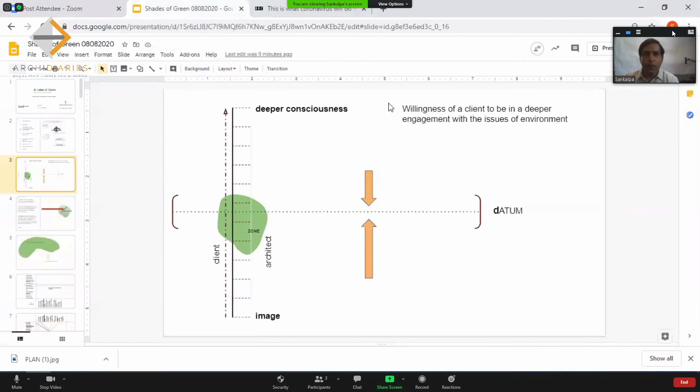Thank you for inviting, and good morning everyone. Today's format, which is a mix of presentation and interview, is quite interesting. What we have done is made a small presentation, which will be followed by a dialogue between both of us.

Today I represent Thumb Impressions, and I'm showing a lot of work related to practice. Thumb Impressions is basically a team of 4 members right now, and their key interest is largely in construction to begin with, and obviously then it touches various other aspects of architecture.

We thought that today's presentation should be titled Process, Contradiction, Challenges. I have put 'hope' in separately, because we hope that in the process of discussing process, contradiction, and challenges, one would be able to see different facets of hope. We don't want to directly touch upon the word hope, but it was important to include.

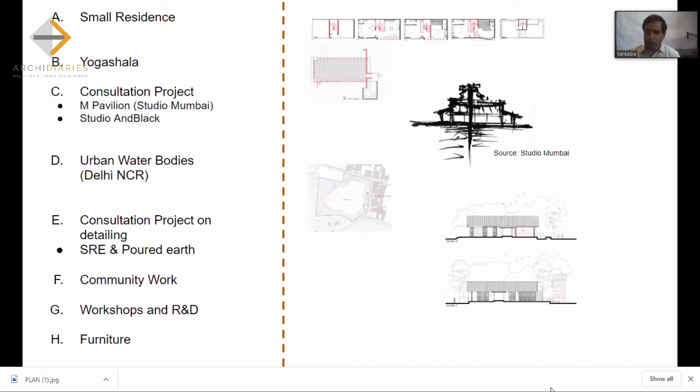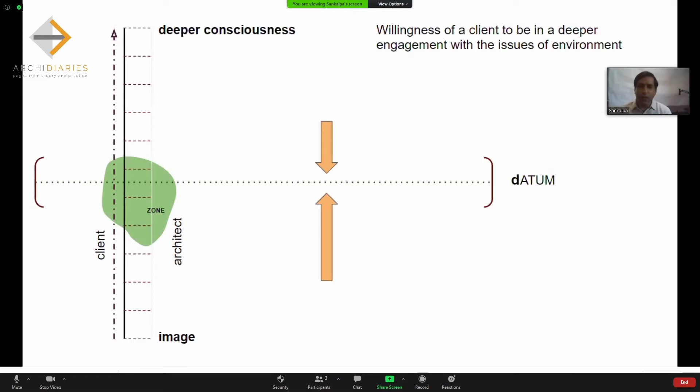Now, what is important for us to at least inquire about, based on our experiences, is a diagram which says that on the lower portion is an image, and on the upper portion is deeper consciousness. These are two different extreme ends of issues of environment.

Based on practice, what we are slowly realizing is that at an extreme, people are selling sometimes luxury in terms of green, which are merely consumption, and at another facet of it is a deeper awareness about the environment. Somewhere in between is this journey which all of us are having.

So on the left is a client, and on the right is the architecture team. The imagination of green for the client is at one point somewhere on the scale, and the idea of green for an architect is somewhere else. Once a project comes in, there is a constant negotiation between the two, and somewhere within a zone will lie this idea of issues of environment which one is concerned about.

Now I want to point out, not from the point of view of our team members, but at least from my point of view, that somebody asked me: if it had been the 1970s and 80s, and you guys had been educated then, what would you have been doing? I said certainly at that time I would have been thinking about working with concrete and steel, because the time was different and the time demanded it.

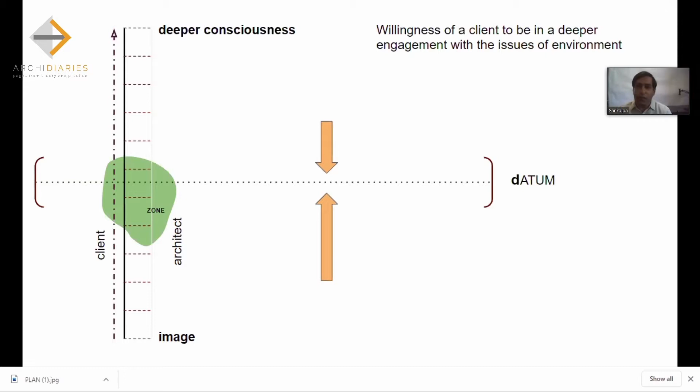But at the same time we are dealing with a profession, and therefore once we deal with professions, we have to deal with realities of the profession. So the process is important, because only once we identify the parts of anything, we would be able to refine it. Contradictions, because there are various factors working simultaneously.

For us, the factors related to construction process, material, and artisanal skills are important, but then there are other project-level feasibility factors which work with it, including conditions of the site, the demand of the project, or the aspiration of the clients. There are various things working together, which in a narrow architectural sense we can call synthesis, but here, to make it explicit, we want to call it contradictions.

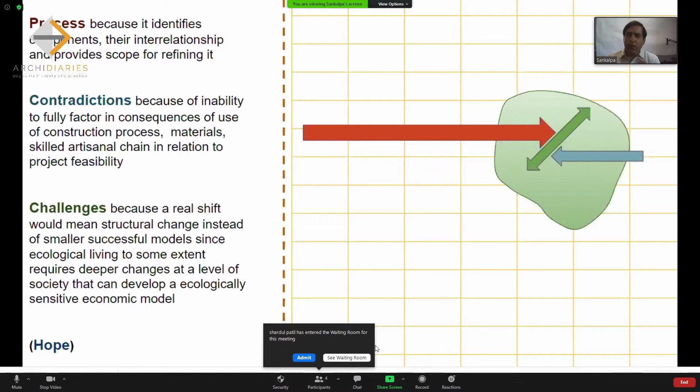And these contradictions start working to deal with issues of this kind. Now obviously, the moment there are contradictions, there are challenges, and the challenges are of multiple kinds. I will take the next slide to elaborate a little bit on that. So there is a space for such a practice to happen.

Constantly, some of the people who have already been working in this area, like Biome, Chitra, and Hunnarshala, have been working. There's also Dust Studio, and multiple young people who have been working in this area. So they have been trying to create some kind of space for all of us to get into, but that space is still a space that needs to be broadened up.

And with that space comes the discussion about the space of architecture. So I have separated it consciously to make that point.

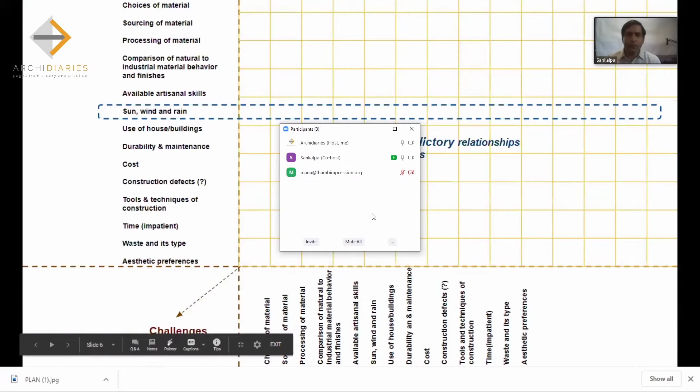So now what I have done is on the left and at the bottom, which means the X and Y axis, I have put some of the factors which we often encounter when we are dealing with these issues. So typical ones are choices of material, sources of material, processing, and comparison of natural to industrial materials in terms of behavior and finishes.

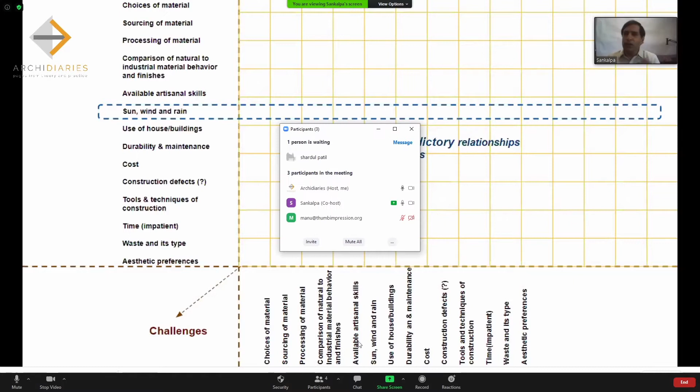Some people want to think that natural material would behave in the same manner as, say, industrial material, or in the way you want to treat concrete, you want to treat rammed earth. So there are all these aspirations, all these kinds of questions which emerge.

Then artisanal skills, or the ability to deal with issues of climate, typically sun, wind, and rain. Then durability, cost, construction defects, time—which is very impatient these days—aesthetic preference, waste, and so on.

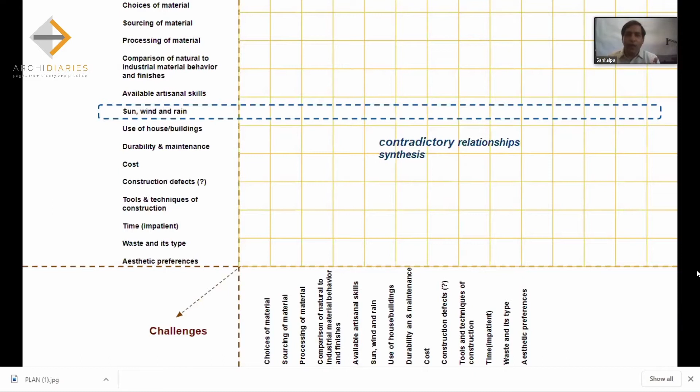There are multiple factors which keep working with each other, and once they start working together, if we connect some of these, they start opposing each other. So diagrammatically, I've put some examples to show that once they start opposing, there needs to be some resolution or informed decisions made for work to happen. It's important to reveal this because these are the difficulties and challenges that are an everyday affair in this kind of practice. Let me get into some examples, and at the end I'll talk about other important facets.

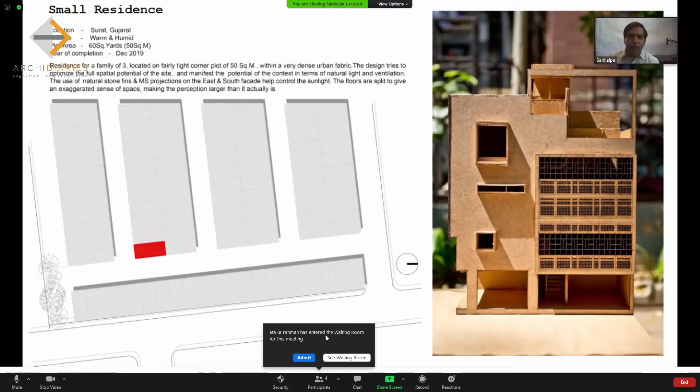So here, for example, this is a small residence we have been working on which has just got completed. This is a very small plot of around 60 square yards, about 50 square meters. If you look at this plot, it largely faces towards south and east.

Because climate is one of the concerns, if you look at how we have organized it, it's very clear that dealing with 50 square meters, the circulation has been optimized to remain somewhere at the center, creating two sets of space. The space facing left, toward east and south, has got better possibility both in terms of breeze and light.

But once you look at the space to the right, there needs to be some more way in which circulation is taken care of. So on the right, in the first section, there is some kind of vent which connects to the top, and that's how we take care of both natural light and breeze. The idea is that as you increase natural light, you reduce artificial light, and therefore reduce electricity loads. So as far as possible, we work with natural elements.

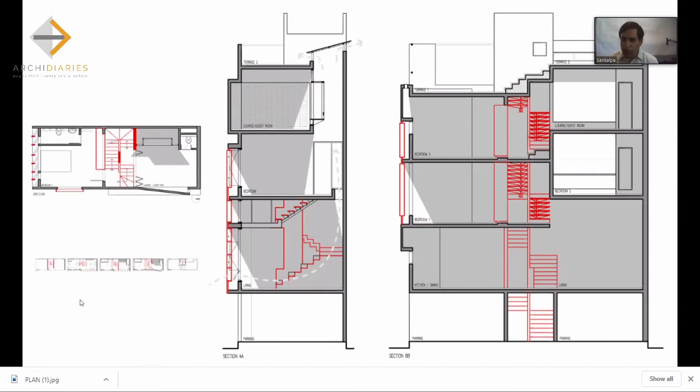This is Surat, so obviously it's a warm and humid climate, and you need a lot of porosity for breeze to pass by. We also do some kind of climate analysis to see how, at different times, the facade responds and what happens inside.

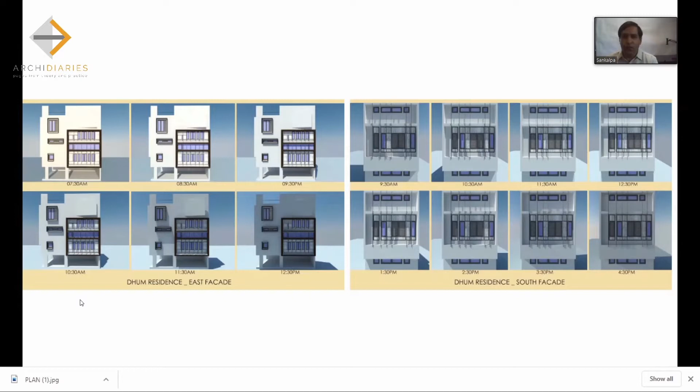If you look at it, there are 4 levels to it, very clearly diagrammatically — the circulation is in between and there are 2 sets of space. So conceptually, the staircase block is the mediator between the two spaces, and the wall abutting the staircase block builds up the relationship between both spaces.

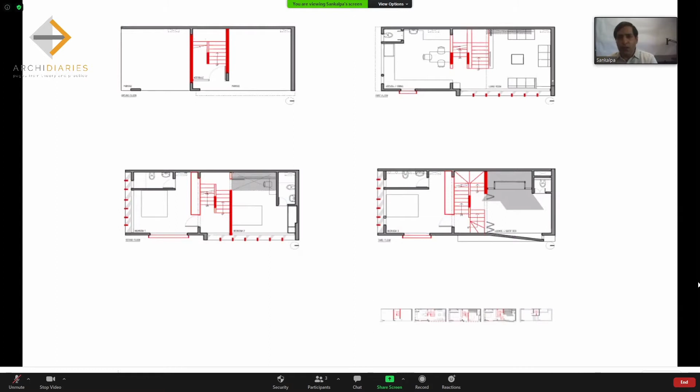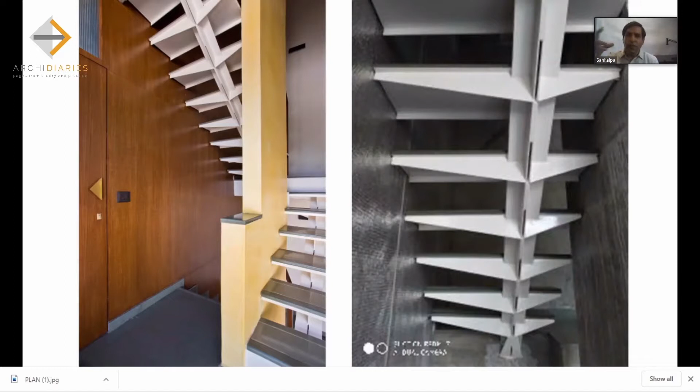You will see in the images I'll show that there is a relationship built between these two spaces. Wherever we get the opportunity, we try to articulate the staircase as far as possible. This is a symmetric loading — we used the folds of the metal and took strength from it, then detailed out this staircase at a few levels to further accentuate the porosity and relationship between the two spaces.

The plasters are basically lime plaster, which is why you see these kinds of finishes. The idea of this project has been, as far as possible, to encourage various artisanal skills to come together and create opportunity for them as well. The slabs are flat slabs, because with flat slabs we get a clear soffit, allowing clear access to light.

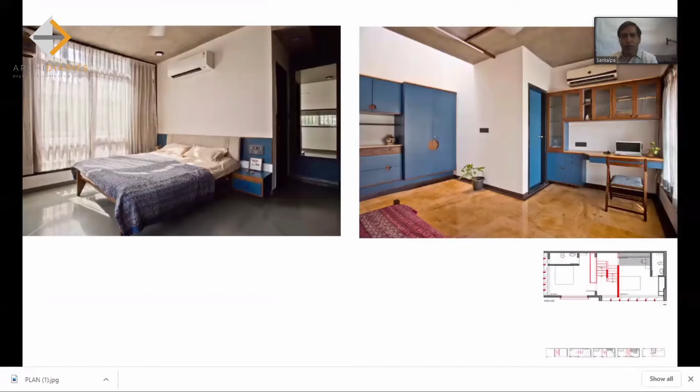So the idea is constantly to try and use natural light as far as possible, and use all the artisanal skills that we have been employing so far. So these are some of the images of that.

I'll just touch upon a few aspects of this project as a diagram. I won't use this diagram in the later one because that will exhaust the time required for discussion. But if you look at the choice of material, on the x-axis the choice of material is related to the sourcing of the material, and at the same time it's related to aesthetic preference.

Now in this project, the client is coming with the fact that they have a particular aesthetic preference, and therefore they are not too concerned about really being green. In that sense, you are trying to negotiate yourself to figure out to what extent you will be able to factor in some of these things.

For example, we created openings and wanted to build them using steel and timber, but ultimately, with the pushing of the client, it got into UPVC, which is very common these days. So there are areas where we struggle and are able to convince, and there are certain areas which we are not able to convince.

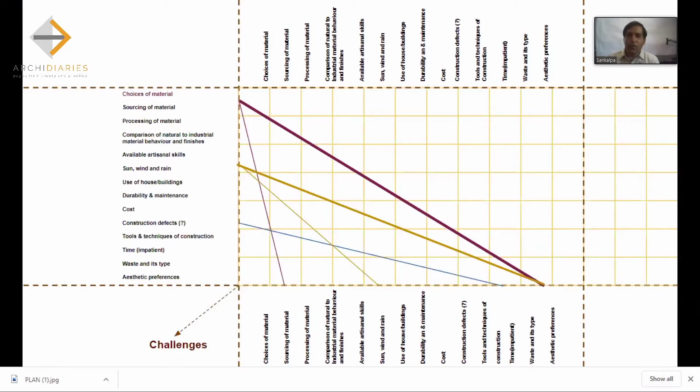If you look at sun and wind, again the aesthetic preference dominates over some other things. We have also represented it using intensities of the line. It's a diagram that is basically a reflection for all of us - it can be more complex than what I've done right now, but it shows that there are contradictions existing. With the process, contradictions exist, and the moment there are contradictions, there are negotiations and challenges that we have to factor in.

One of the other concerns for all of us has been to simultaneously look at space and structure together, and how we articulate space in a way that the structure gets revealed.

This is a diagram from some other project we are taking. If you look very clearly, this diagram has got filigrees, but at the same time the walls are getting in and out to reveal various ways in which the filigree can be revealed. This has been one of our obsessions - with space, how do you work with structure and how do they come together?

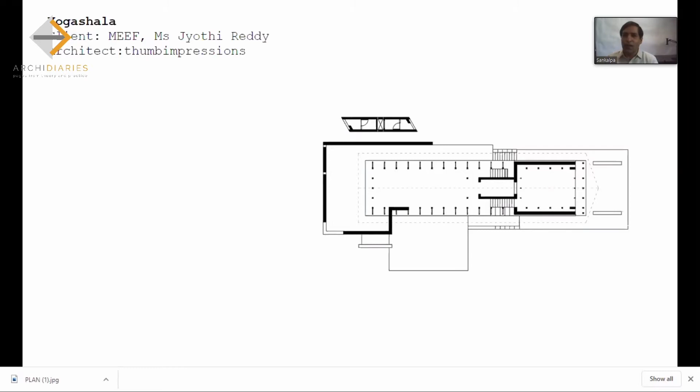So some of the projects, like this one where you are trying to make something like a Yogashala, it becomes much easier to work on some of these lines. It's a very simple pavilion kind of structure, which uses steel and timber as a bearing member, and bamboo as a spanning member.

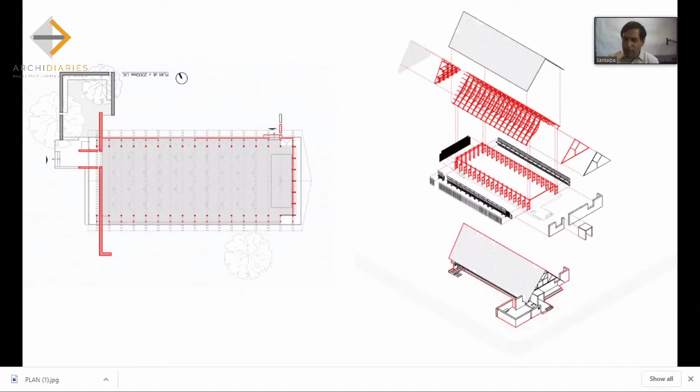If you look at it, you will see that based on orientations, we have selectively opened some portions. Looking at north versus south, there are certain ways in which openings have been articulated, because we know that from the south we'll get vertical sun, but from the north you can really open up. This is one of the inside views of it, showing the space in the manner in which it would come out.

So you see one way in which you see the relationship between the bearing member and the spanning member, and obviously the span goes around 12 meters, etc. So you will have to take care of the way the spanning members are articulated.

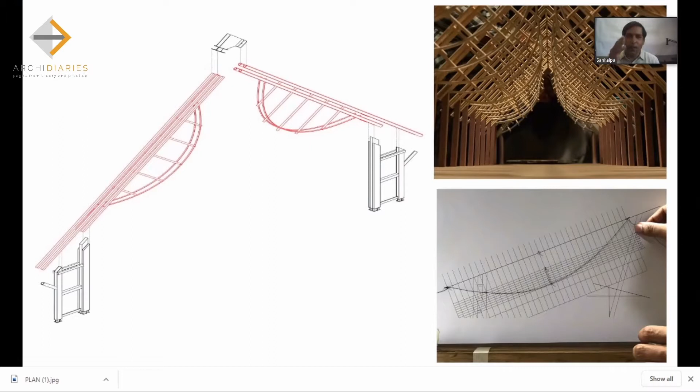Again, an experiment, a modeling experiment - you get your profile, and then the vertical members of the spanning are basically moment connections, and then you develop various details of it, where you are trying to work out a detail that is able to...

...take care of the differential diameter of bamboo. So how do you work with a varying diameter of bamboo using universal joints? That's one of the most difficult parts of working with bamboo, because the material is not uniform. So you will have to develop a detail which is adaptable to changing diameters of material.

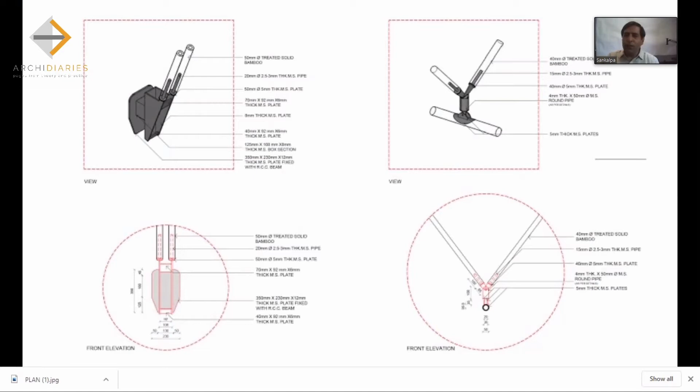So we have done this because we have factored in the various ranges of diameter which are there, and instead of holding it fully, we are holding it partially, because that would be able to fit various diameters. So some of the images of that - this project is about to start now. The other kind of work which we do is consultation projects on detailing.

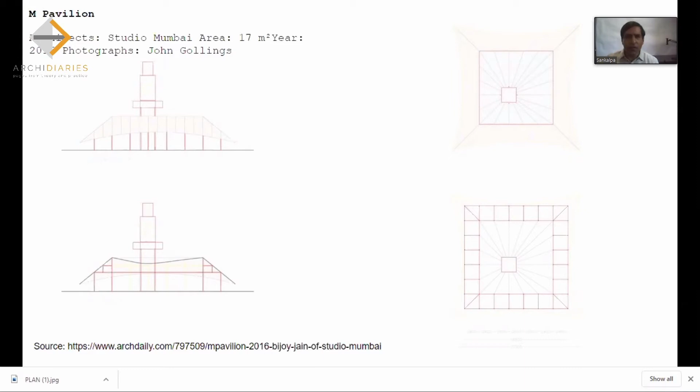So this was M Pavilion by Bijoy Jain, and this was one of the early projects which we did where we were bamboo consultants. So right from detailing to sourcing of the bamboos, everything was done by us. Obviously the idea comes from Bijoy, which I won't articulate here, but our concerns were more in terms of detailing, and Arup was the engineer.

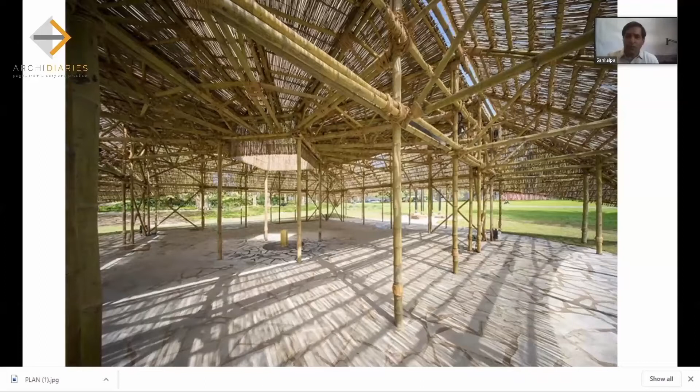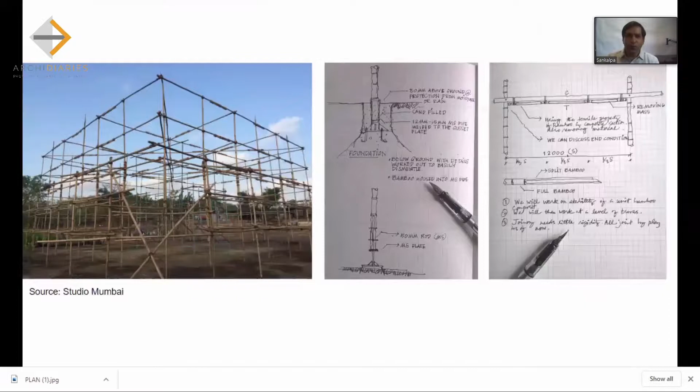In the early part, because of paucity of data, Arup came up with a very heavy structure. But later on site, working with the whole team, we were able to work out various details, test them, and then suggest to them, and they did calculations that showed you don't require so much material to do something of this kind. Eventually on the right you see the final setup, and the outcome of which you saw earlier in the presentation.

It was quite challenging, but at the same time really nice to work in a space, because right from the beginning, the space and the experiment in trying to figure out the structural system details were working simultaneously. We were always doing 1:1 and trying to correlate with space. It was a very unique experiment where you are almost working like a furniture designer, where they have the scope of working 1:1. This was a project with Studio Mumbai where we were able to do something of this kind.

We also did some work for Jwalant, where he wanted an outhouse, again in bamboo, but the lower deck is steel, and then the bamboo starts.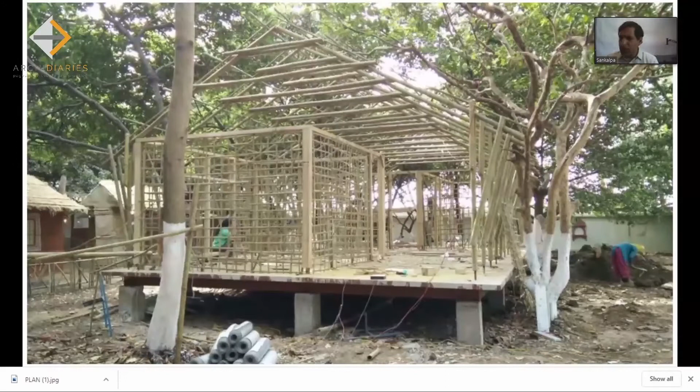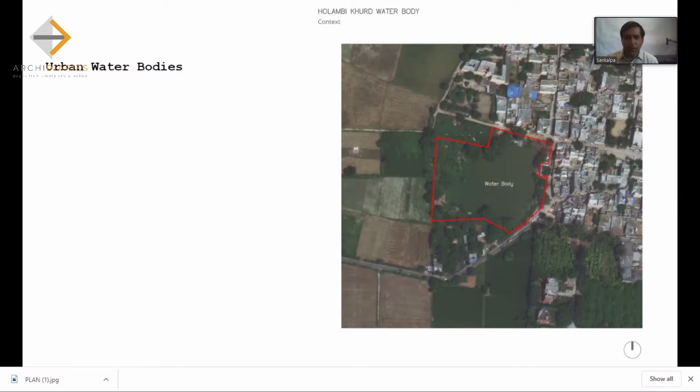Now some of the projects we've been getting into are urban projects related to water bodies, where again the concerns are environmental. This is a project which we've been doing, and it would soon be in the execution stage. The design stage and rest of the other stuff is complete. The client is the Irrigation and Flood Control Department of Delhi, and the project from the environmental perspective was given to NEERI, who eventually gave it to Thumb Impressions and Rootbridge to work out the design part of it.

So we've been doing this, I'm showing you one of the projects. There are 29 water bodies that we've been working on. This is one of them, and soon it would be executed.

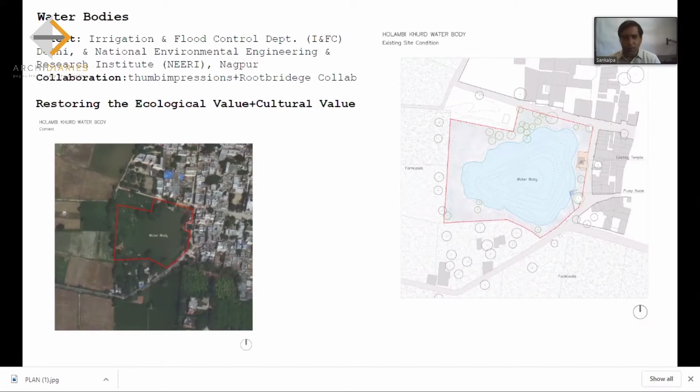The idea is always two parts. One is to restore the value of the water to what it was. The second is to look at the periphery and create a context for urban life to occur around it. So there's a cultural value to it as well as an environmental value. This project is almost like an early stage project trying to move toward an urban design kind of project, like the first step before you can get into an urban design project.

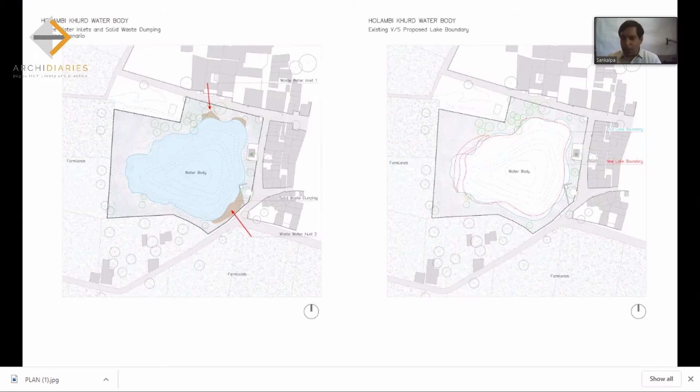Obviously the treatment of water and all those details is coming from NEERI, and we are trying to do the design part. So as far as possible, we've taken care of the edge conditions and done some basic stuff required for an active urban life to happen. Now this project will get into execution soon.

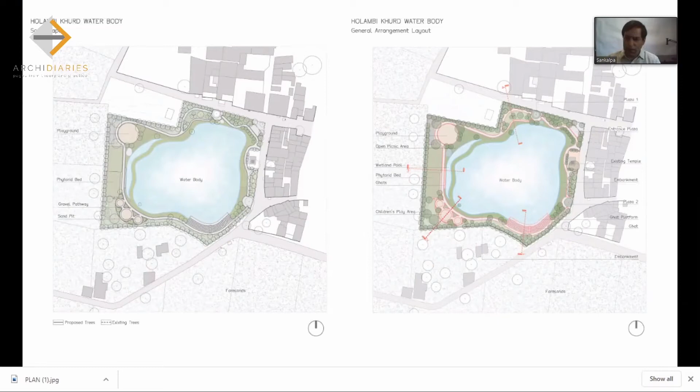And these are some of the images of these projects. The planting scheme or the kind of species are related to the local environment.

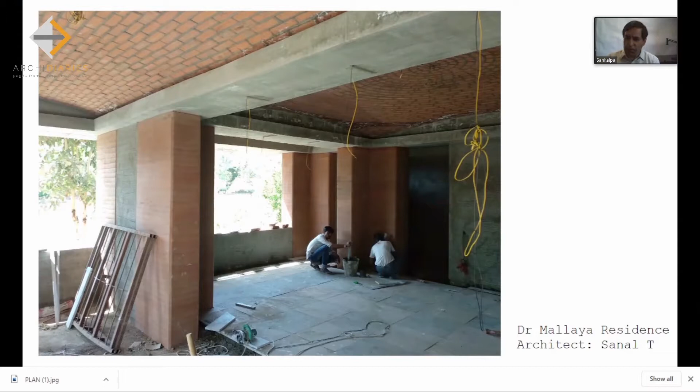We have been also doing projects related to execute work. There's a project which we did for Sanal, and if you look at these projects, we were helping him to sort of detail out as well as execute stabilized rammed earth. So these are some of the consultation projects on detailing of SRE.

As far as possible, we try and use natural colors, but sometimes we are also using pigments which are artificial. So this is where the question sometimes can come, where you can think about what is the percentage of cement that has been used.

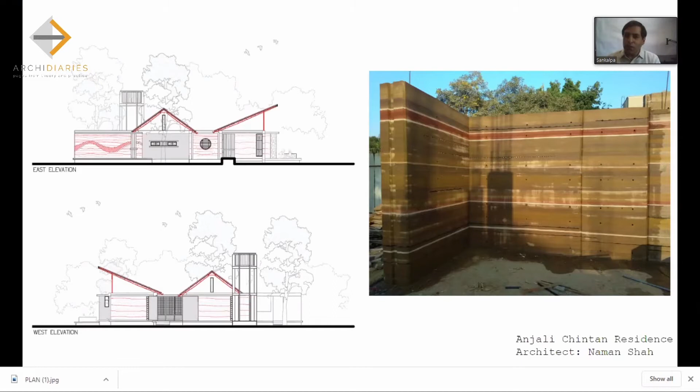In some of these cases, there are 7% cements. Why are you using, let's say, an artificial pigment? So these are some of the contradictions that happen because you are constantly dealing with a project where clients have got certain aspirations, and you are trying to convince them what works. An architect also tries and figures out that there is a value for it, but then pushes ahead and tries to explore further.

And then there are other kinds of questions that start emerging, which are contradictory and challenging.

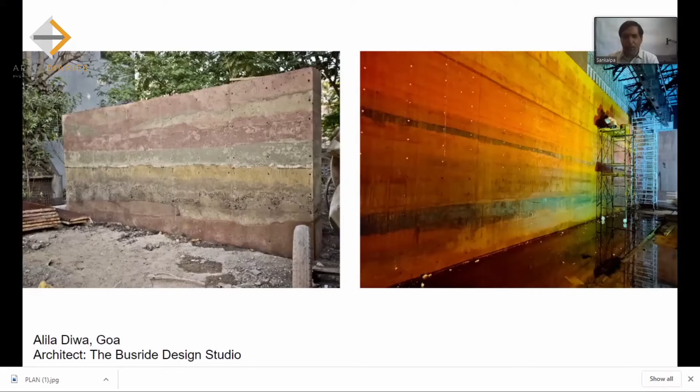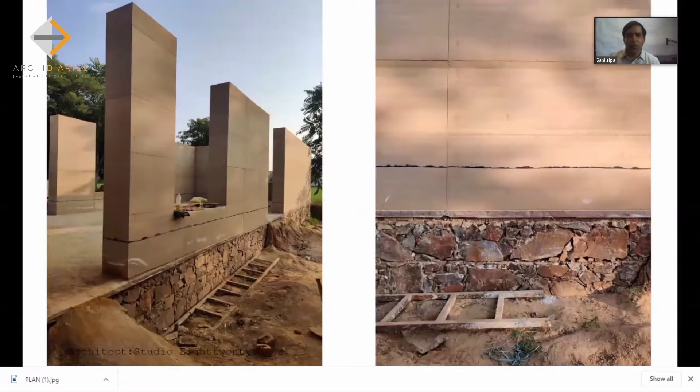We are doing another work for Studio Eighttwentythree. This work is in Jaipur. Again, we are trying to work with rammed earth and stone. This work started pre-pandemic, so of course, with the pandemic, many of the projects got delayed.

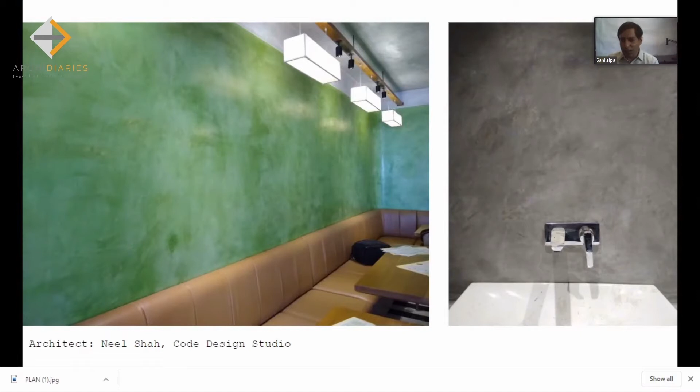This is the work which we did for Code Design Studio. This is a lime plaster, you can see. This is work which we did for Tulna Akruti Studio.

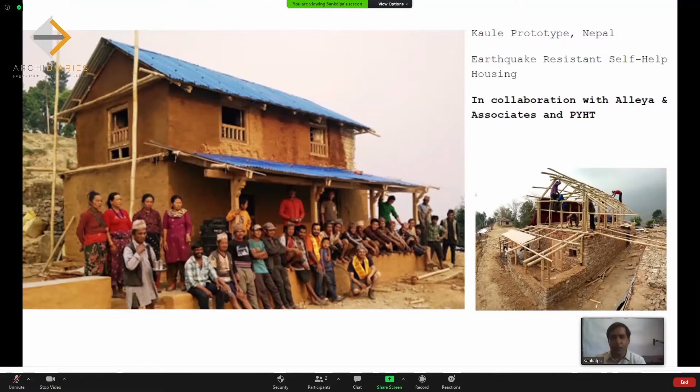Then we have been also doing a lot of community work. This work, in which from our side Manu was involved, with Alleya and Associates and PYHT, this work which we did for earthquake. So one sample house we did for in Nepal, and this project also got recognition. I think it got HUDCO, one of the awards of the HUDCO housing.

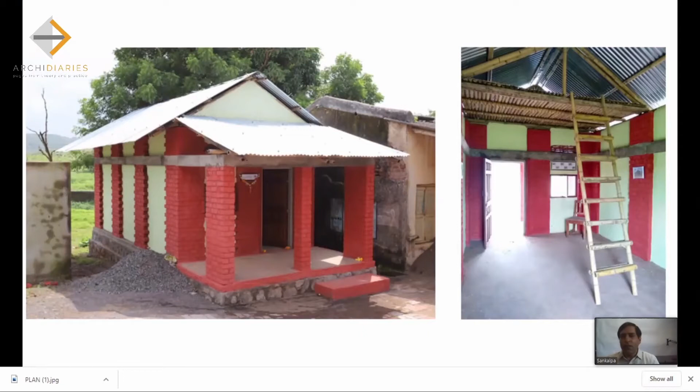We have been also working with our network organization, Hunarshala, People in Center, and the studio to work on projects related to rural development. This is one of the projects where we documented entire housing types, rural housing types of Gujarat. We divided it into various zones, and then proposed various houses that can be made out of it. Then at different regions, based on the cost constraint and based on the strength of the region, there are some proposals that we have made.

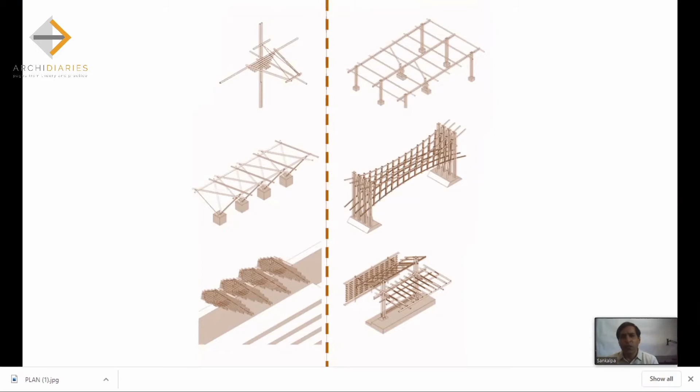We also do a lot of workshops and R&D with students. When we do, most of the time we are always pushing ourselves to try and do something new. So in all this, what you see, there is one or the other detailing that we have been able to work out. Some sample examples, I'm sure.

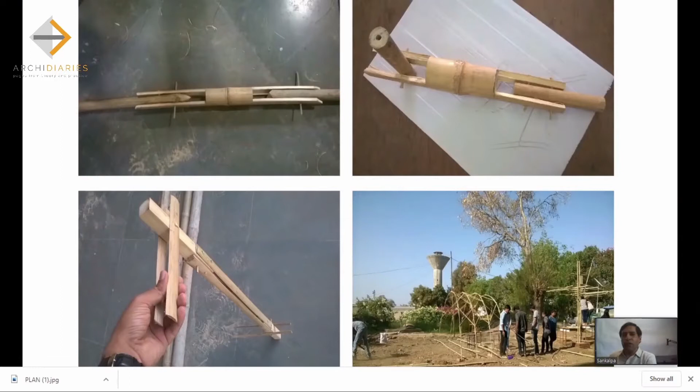Every time you are doing this, you test it here, because then later on, once you get a larger project, you are able to execute it. This project we did with PYHT, detailing using split bamboo.

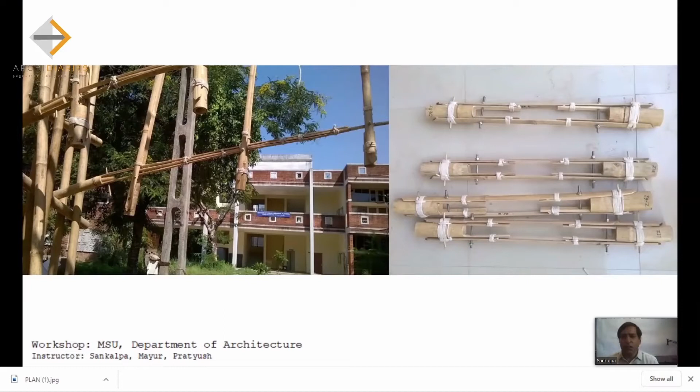Then this is the project, this is again the workshop which we did for MSU students. Again, there are some ways in which we have detailed out.

Now, if we have to practice it, we have to develop an ecosystem around the delivery. So for example, if we are trying to work with the idea of green, then there has to be an ecosystem, like the ecosystem of when we have to do a work in concrete. There is a market chain, there is already an ecosystem existing for it.